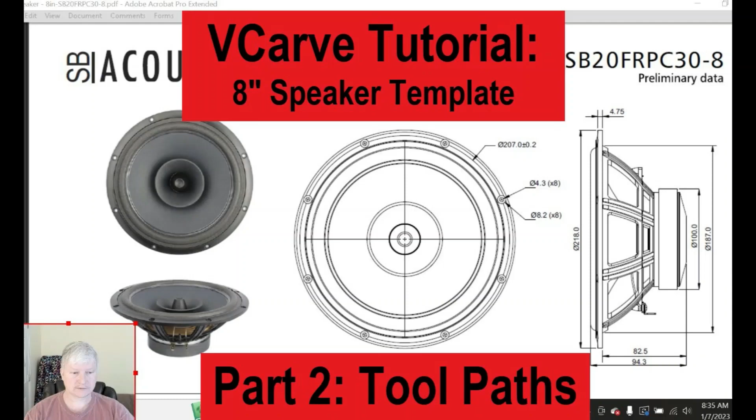Hey guys, sorry, but I had to break this into two parts because I had to leave and take care of some personal business. But we'll get back on this.

And so far, all I've done is I've opened the 8-inch speaker template file that we created in part one. If you haven't watched part one, you should click on the link and go ahead and watch it first, because in part one we drew the vectors that we're about to use now in part two to create the tool paths to use in the CNC.

So let's get started. Okay, so the first thing that we're going to do is we're going to click on the tool paths tab, and then let's click on the pin so we can turn off the auto hide function.

So the first thing that I will do, I will insert this 15-degree engraving bit. I will draw center lines on this piece, and I will touch off on the center. I will move to the extreme positions and make sure that my workpiece is aligned parallel with that axis. And once that's done, I will zero the X and Y to this piece.

And while my engraving bit is still inside the machine, we're going to go ahead and engrave these 4 alignment marks. So what we're going to do is we're going to select this vector. And by the way, you can turn any of these on and off that you wish. I left this as we left the state of each layer in the last video.

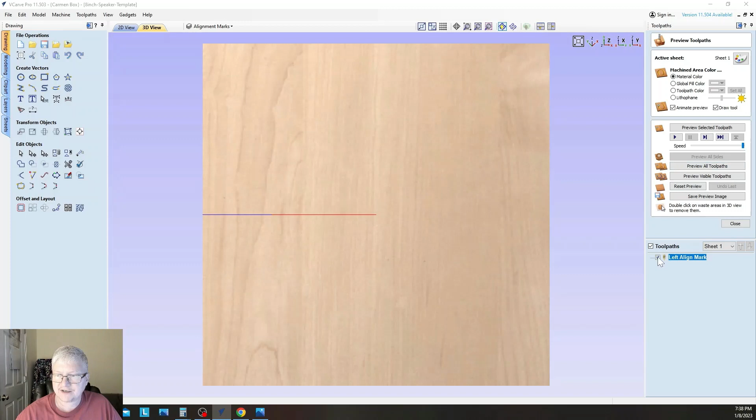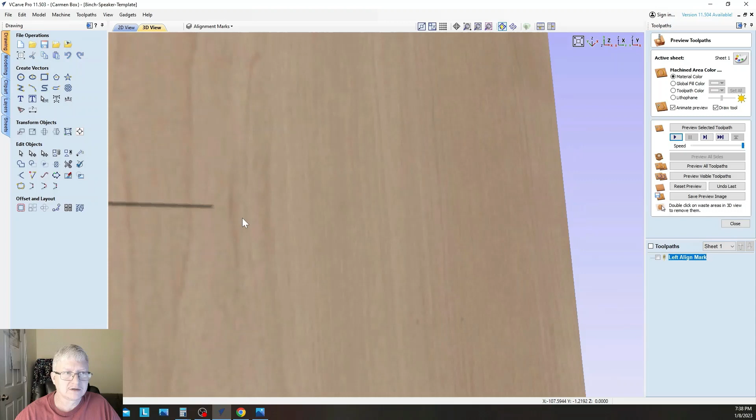And you don't have to preview this, but if you want to preview the toolpath before we generate the rest, you can click on this play button, and you can see that first carve, which is really an engrave. And then if you left click on this 3D piece, you can move this around and look at it and see what you think of it. I'm satisfied with it. I think that that'll be a good mark. And we're going to go back to the 2D view now.

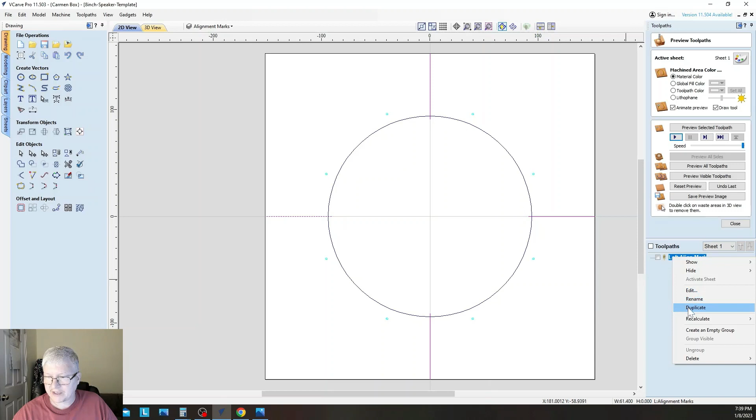And now we are going to select this toolpath that we just created. And I like to select rename, and all of these are going to be align marks. So I'm going to copy this segment. Okay. And now this toolpath, I'm going to duplicate 3 times. Okay, now we're going to rename this. We're going to call it top align mark.

Okay, and what we're going to do is we're going to engrave this mark, and then we're going to go up here and engrave this mark, and then we're going to go here and engrave this mark, and then we're going to go down here, because after we engrave, we're going to drill these holes.

All right, so we're going to do the top, rename, and this will be the right align mark, and I'm just hitting Control V and pasting that after I type which one it is. Didn't mean to do that. And rename, and this will be the bottom.

Control V, bottom align mark. And then now what we do is we go to the top align mark, and we double click on this to open that toolpath that we copied. And if you look, this is the vector that's selected because we copied that toolpath using that vector. And now we're just going to click off of it, and we're going to highlight this top vector and hit calculate, because everything else is the same.

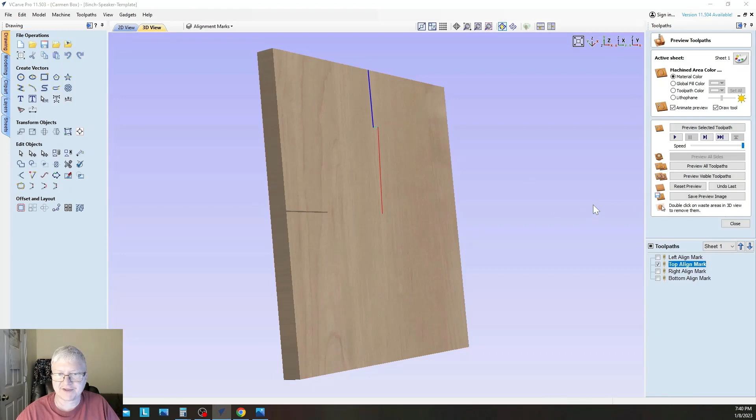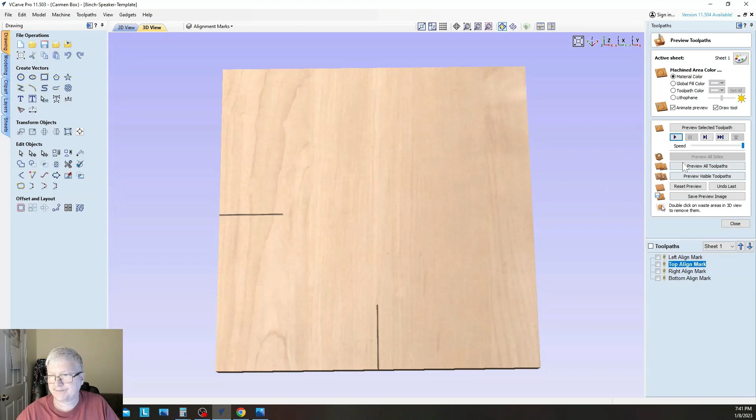Now, you don't have to preview these if you don't wish to, and I'm not going to yet. And I'm going to double click on the right align, go to 2D, and I'm going to select this vector and hit calculate. Then I'm going to double click on bottom align, and then I'm going to highlight this vector and hit calculate. Okay, so now if you want, you can look at these, hit the play button, and you can hit this button and preview all of them.

And as you can see, those are going to be deep enough to give us some good alignment marks. And when we carve the speaker hole out, we'll be able to align from the inside and or the outside. So now let's go back to 2D view, and we are now finished with the alignment marks. And the next thing we want to do, we'll do the screw holes. We'll close this. The screw holes, we're actually going to do a pocket toolpath.

We can start on any of these because we're going to do a bit change, but it's nice to get in the habit of setting these up as if you had an auto tool changer, or in the sequence that you would want to execute these toolpaths, because oftentimes you're not going to do a tool change. We are going to do a tool change though, so you can do whatever order you wish. I'm going to come down here though and select this first hole, and then now I'm going to go up here and I'm going to hit a pocket toolpath.

And in the pocket toolpath, this workpiece is going to be 19 millimeters, and we want to leave a little bit, just enough that we don't carve through to our wasteboard. So I'm gonna tell it to go to a depth of 18.75 millimeters. If you don't have the correct bit already selected, you can remove this and then hit select, just like we did before. Here, I'll just show you this. We're going to use a 1.5 millimeter mill, but let's just hit remove. Okay, so this is probably what you'll start with.

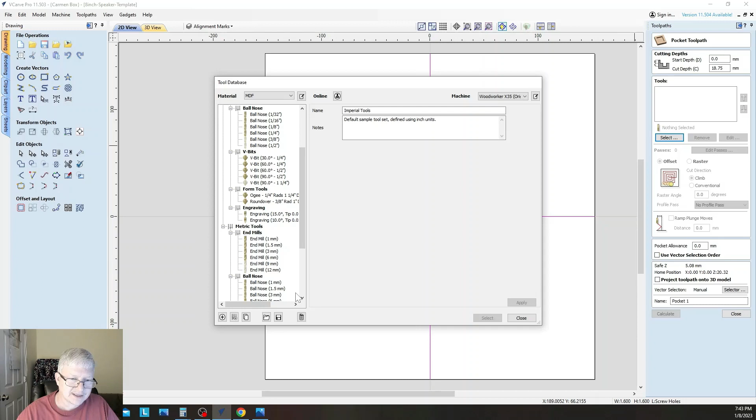So hit select, and we're going to go to end mills, metric tools, metric end mills, and we're going to select the 1.5 millimeter mill and hit select. Okay, it says we're going to do 38 passes because of the settings for the bit. Let's go click on edit here. We're going to be carving this in MDF, so we can go a deeper pass than 0.5 millimeter.

General rule of thumb is that people have a tendency to do a depth of half of the diameter, but in this case we're going to go a little bit further than that. We're going to say 1 millimeter per pass, and then once we select the depth pass of 1 millimeter, we hit OK. And if you look, now we have 19 passes, and hopefully this will be okay, and I'm pretty sure it will.

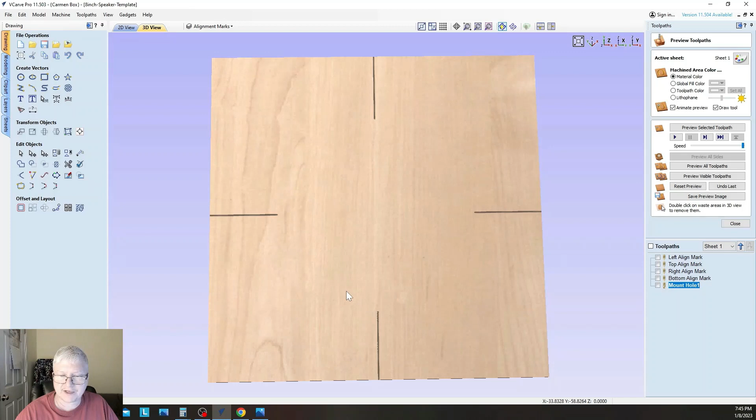But we're going to call this mount hole, and then we'll add a 1, and I'm going to highlight this and hit Control C, I'm going to type in my 1 here, and then I'm going to calculate this toolpath just like before. And now I'm not going to preview this individual toolpath. Okay, what I'm going to do is I'm going to go back to the 2D view, and just like we did before, we need 8 of these, so we need 7 more.

And we just right click, and we go to duplicate and left click, and then duplicate. So now we have 1, 2, 3, 4, 5, 6, 7, 8. Okay, so now, just like we did before, we will double click to open this, and we will choose the next hole that we're going to carve in the sequence.

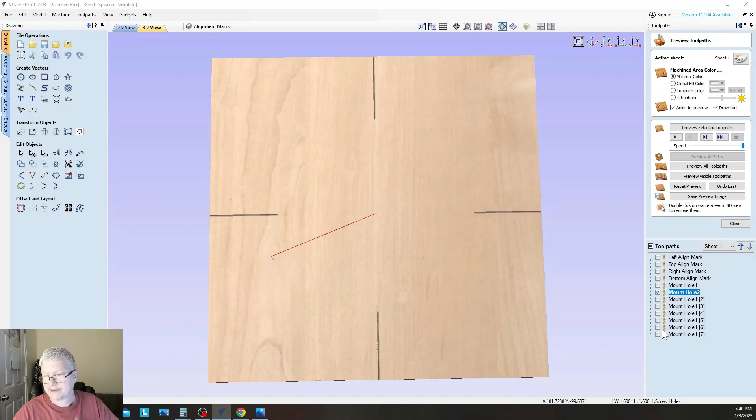We'll hit Control V, and this will be hole 2, and hit calculate. And then we go 2D view, same thing, double click. This will be hole 3, so Control V, 3, and this will be this vector, and hit calculate. And then now we go 2D view again.

Now we go to hole 4, which is going to be this hole. Again, double click, drag to highlight that, paste in where we copied the word mount hole, the label, and mount hole 4. So now this is this hole. So we select this vector and hit calculate. So now we have 4 of these.

Double click, 2D, Control V, 5, and that will be hole 5, and then we hit calculate. And basically this is what we're going to do all the way through here. And so I'm going to spare you the rest of these. They're exactly the same, so I'll jump ahead in the video when I'm done, or speed this up.

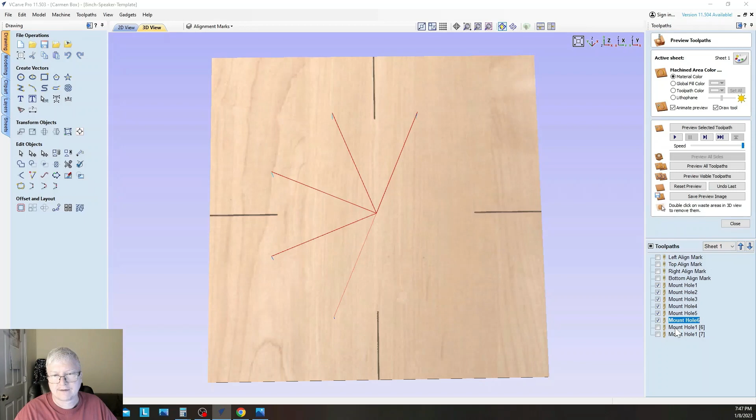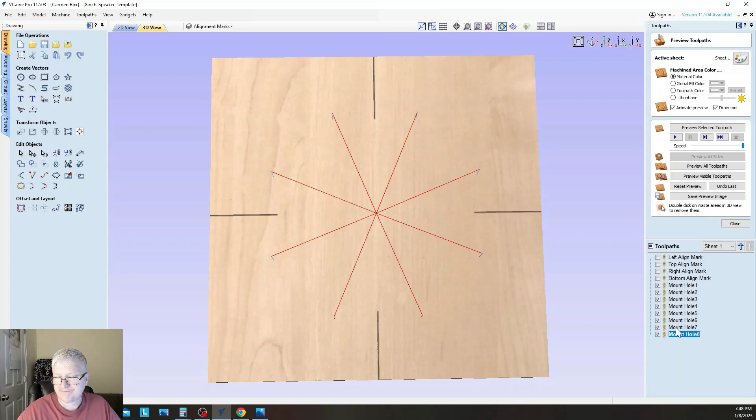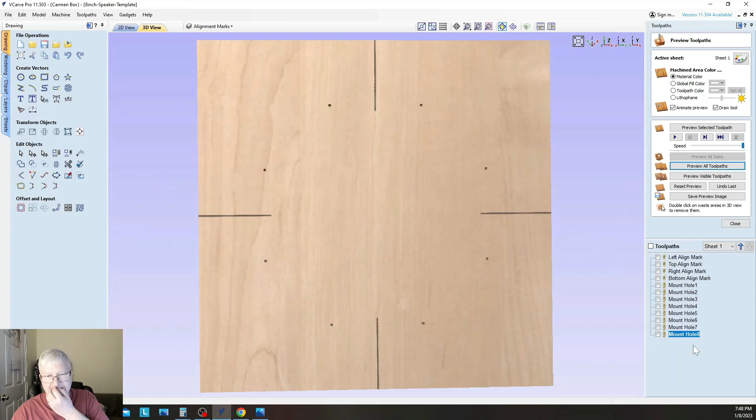Okay, so now that we've edited all of these tool paths so that we have selected the correct vector, we can go here and hit preview all tool paths. And now you'll see your mounting holes are in the correct positions, and you should also notice that they're not going all the way through the blank. Alright, so now we have the mounting holes, we have our alignment marks, and the only thing left for this carve will be the speaker hole.

So we go up here and we will highlight the vector for the speaker hole. We'll close this preview, and then this is going to also be a profile toolpath. And now we are going to cut again 18.75 millimeters. So we leave 0.25 millimeters, really just enough that we don't hit the wasteboard. And now we're going to change bits again.

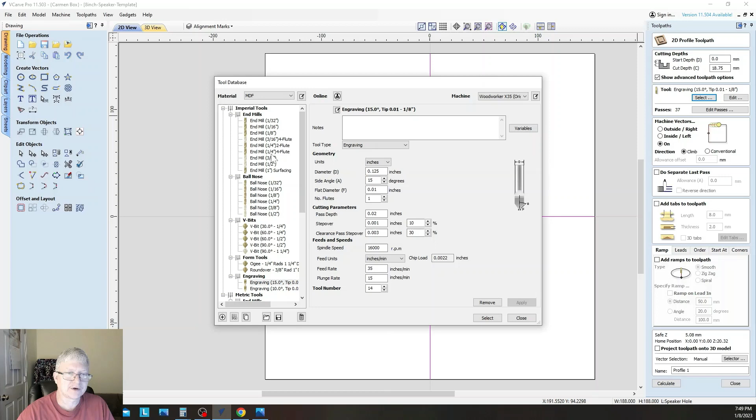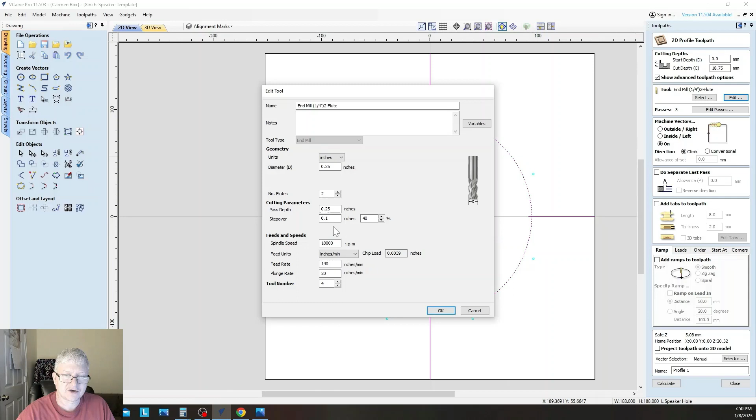And when we change this bit, we're going to go over to a 1/4 inch. It'll be a 1/4 inch 2 flute end mill, and hit select. And as we see here, it will default to 3 passes, and that should be fine. But let's look and see how much we're taking per pass. And we are taking a 1/4 inch per pass, and I think that should be fine.

And we have the vector highlighted, and then if we go down here and look at the machine vectors, we're still on the line, and this is because VCarve remembers the last group of settings for your carves. But now what we want to do is we want to look at inside, because we want our mill to be inside here. And now we will call this speaker hole.

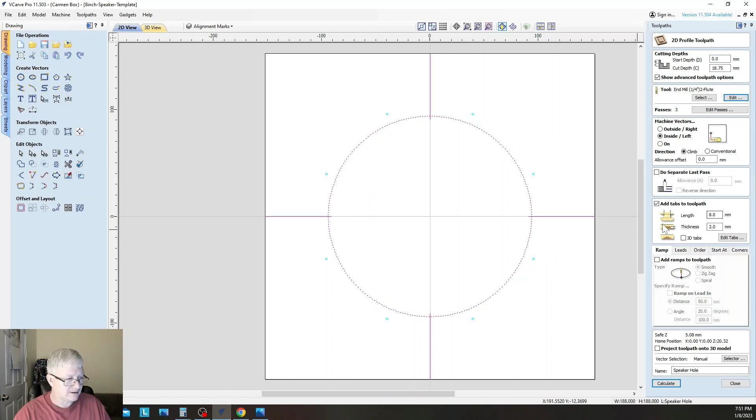Okay, and now that we have the speaker hole, oh, there is another thing. You don't need to do it on this carve because we are leaving that 0.25 millimeters, but if you're cutting outside here especially, or something that doesn't require a finish surface, and sometimes even when it does, it's necessary to add these tabs. When you hit add tab, which we're not going to use, this will be the length of the tab and then the thickness before it goes all the way through the bottom of the workpiece.

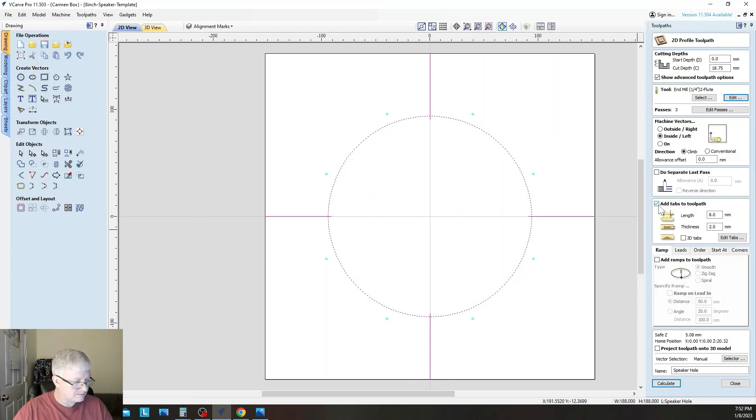So you can leave like 3 millimeter tabs, and that way your blanks don't move around and the pieces that you cut don't come loose and hit your mills. And then after you do your carve, you take a saw and you cut the rest with the saw, and then you just file it or sand it flat. But we're not gonna use tabs. And we're going to calculate that tool path.

So now that we have all of these tool paths generated, we're going to close this, and we are going to select the left, top, right, and bottom, because these are the paths we want to carve first. Okay. And then we'll go up here to Save Toolpath and click on this, and we're going to select Visible Toolpaths to one file. And this is going to take all of these 4 paths and merge them into one G-code file.

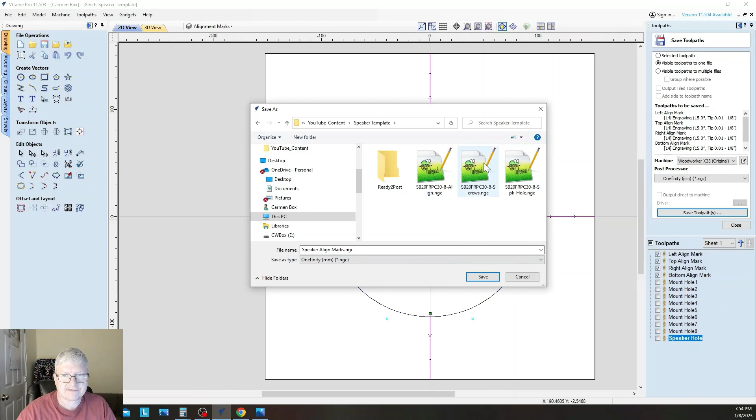And we'll call it Speaker Align marks. Okay, and again, we can put it wherever we want, but we'll just call it that for now. And I've already done these before, but I'm going to go ahead and just select a new folder and save that G-code in there.

So now we're going to deselect these, and now we're going to do all of the mount holes. And we'll do the same thing. We'll do all of these together as one file. So we'll say Save Toolpaths, Visible Toolpaths to one file.

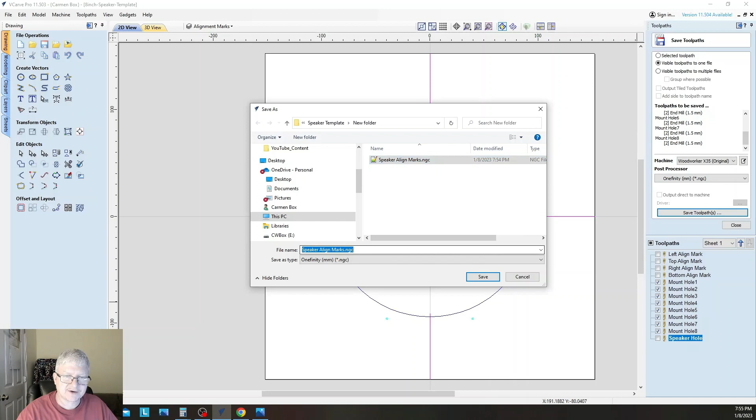And we'll call this Speaker Mount Holes. Okay. And save that. And then now we'll deselect these, and we'll select the speaker hole, and then we'll save that toolpath as speaker hole. So now those 3 toolpaths are ready, and if you have 19 millimeter thick material, you can run these in your machine.

And the reason we didn't do these all as one merged file, we have tool changes. So we're going to insert the engraving bit, we're going to center the workpiece, and we're going to set our offsets for X and Y, and Z will touch off on the workpiece for the engraving tool, and then we will execute the speaker align marks. And if you want, you can put a number in there, but you can actually do them in whatever order you want, but this is my preferred order.

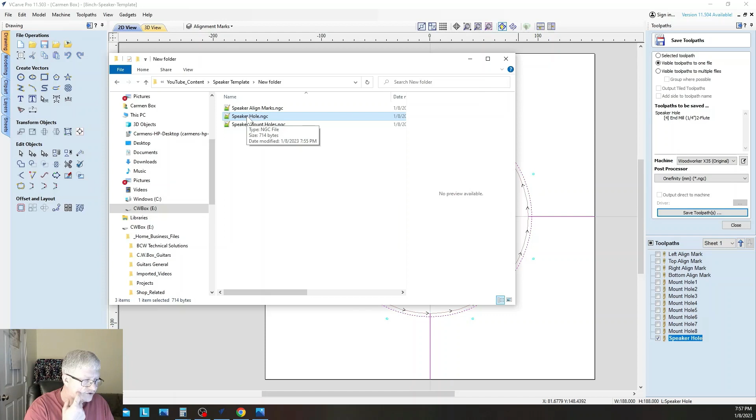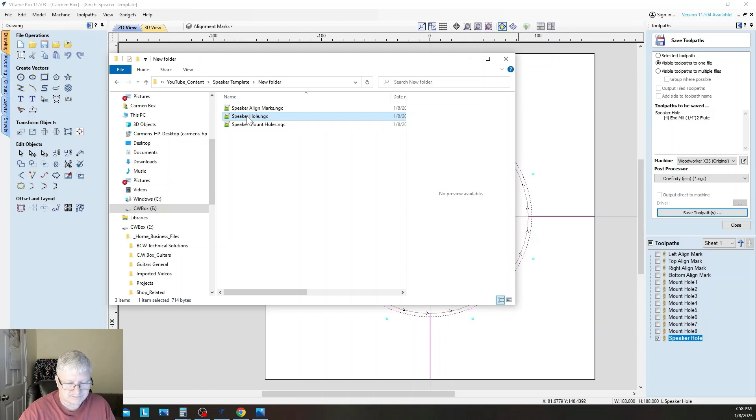And then once we complete that G-code, we will do another tool change, and we will insert the 1/4 inch end mill, and I'm going to use a down cut end mill. We will touch off on the top of the workpiece again for the Z, and then we will execute the speaker hole. And once we're finished with this, we will be done, besides pushing everything out with that 0.25 millimeter leftover sliver. And I wanted to point something out.

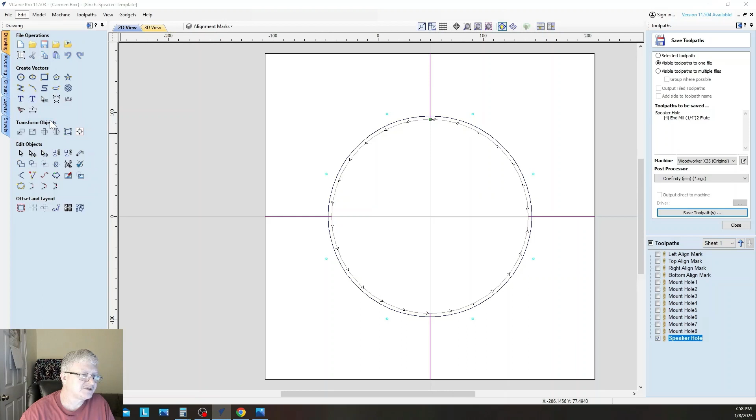If you were going to carve this template and you knew you wanted the template to be 12 inches by 12 inches, and again, we can go to edit and job size and position, and this is the equivalent to 12 inches, 304.8 millimeters. If your workpiece is not going to be exact, and this is something that I like to do, and I would have shown you on this, but we'll do that another day. I like to make the workpiece slightly larger than what I'm going to have for a final carve, and then I will add vectors for the 4 sides or whatever I'm going to cut off.

And then what that enables me to do, I can take whatever I'm using, and as long as I have center reference marks, the machine does not matter. It's going to cut based on that center position of our offset. So this piece could be 24 inches by 24 inches, and if we touch off on the center and we draw the square vector here, we can add that toolpath so that if our piece is not 12 by 12, we can cut it into a 12 by 12 piece and not have to fool with cutting it again on a saw or whatever. But anyway, I just wanted to point that out.

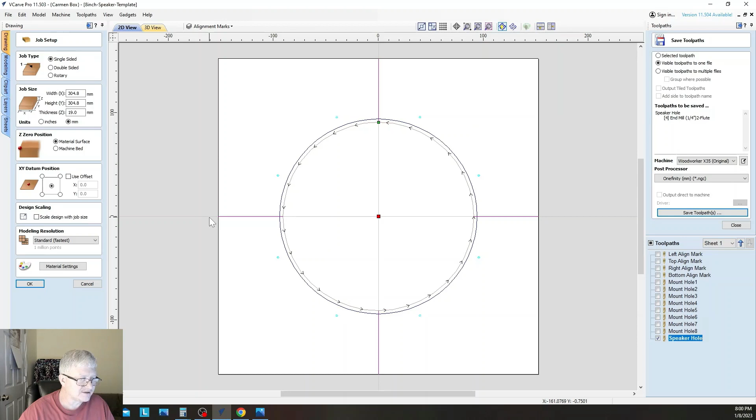But that's the end of this segment. The next segment will be the CNC machine, where we will load these toolpaths, and we will touch off on the workpiece and carve.